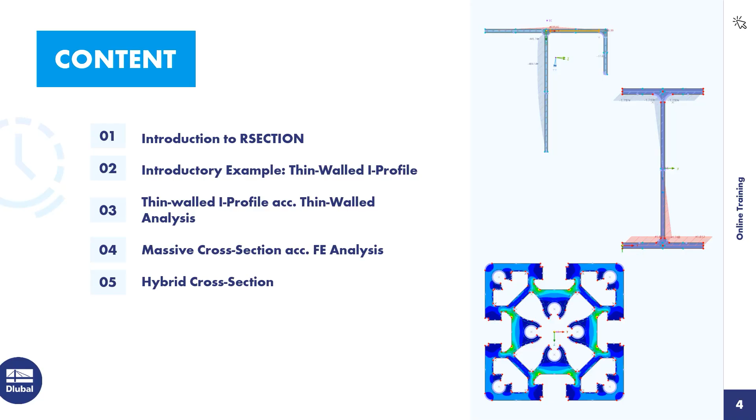In another example, I show you how to insert cross-sections from the database and how you can add other parts to this cross-section. Then I show the modeling of a massive cross-section based on a DXF template. Finally, I model a hybrid cross-section. Then I open RSECTION.

RSECTION is an independently executable program for generating any thin-walled or massive profile. If you want to design special profiles in RFEM or RSTAB that are not contained in the profile library, you can create them with RSECTION. You can then import these user-defined profiles into RFEM or RSTAB. In RSECTION, it's possible to calculate cross-section values and stresses.

The RSECTION user interface is the same as in RFEM 6 or RSTAB 9. The cross-section graphics and dialogues are displayed in the working window here in the middle. Most tasks can be performed with a mouse. In the tables here below, the keyboard is primarily used for numeric input and output of results.

There are three navigators in the left pane of the working window: the Data navigator, the Display navigator, and the Results navigator. The Data navigator manages the input data. A double click on the corresponding entry opens the dialog in which the selected object can be changed. However, it's also possible to create new objects via the Data navigator. Just right-click on the object and choose, for example, new point, and then you can enter the point properties.

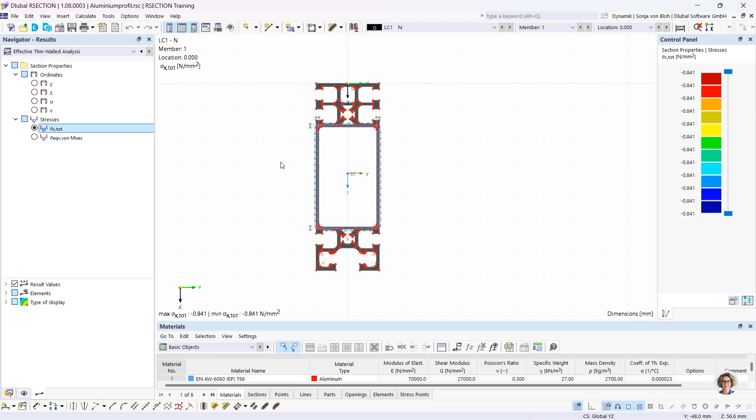Then I would like to go into the mouse functions. To move the section, you can hold down the mouse wheel and move the section accordingly. You can turn the mouse wheel to zoom, and right-click to open the context menu. You can also select objects with the mouse. If you drag a window from left to right, everything that's completely within the selection area will be selected. If you drag a window from right to left, everything that is intersected by the selection area will be selected.

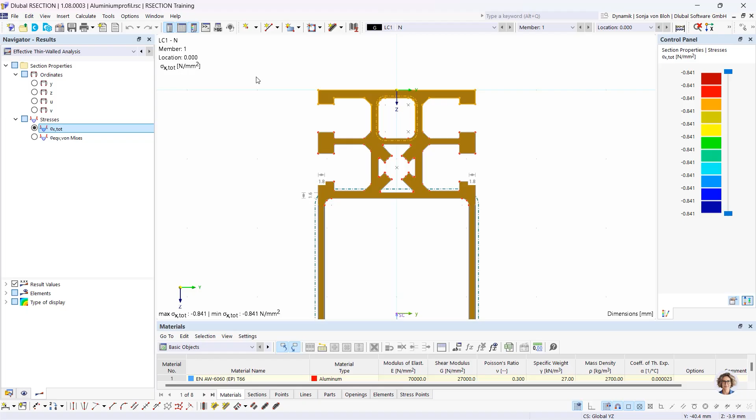You can also select individual objects. To do this, left-click on the objects that you want to select. If you want to add objects to the selection, hold down the Control key and then left-click on the corresponding objects. If you want to remove objects from the selection, hold down the Shift key and click on the objects.

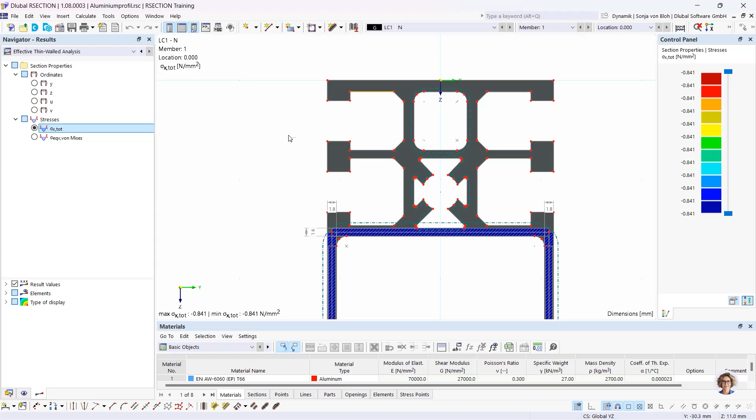This brings me to the first example. To create a custom profile, open the new model window via this button here. First, I have to enter the cross-section name. I name it example 1. Then I have to define the analysis method. We have two analysis methods available: the finite element analysis and the thin-walled analysis. I choose the thin-walled analysis here.

It's also possible to calculate the effective cross-section. For this, it's necessary to activate this add-on. The effective cross-section can be calculated for both analysis methods. After activating this add-on, a standard must be selected according to whose rules the subpanels are generated and the effective cross-section is calculated. The following standards are currently available: Eurocode 3 Part 1.1, Eurocode 3 Part 1.3 for cold-formed cross-sections, and Eurocode 9 for aluminum cross-sections. I choose Eurocode 3 Part 1.1 here.

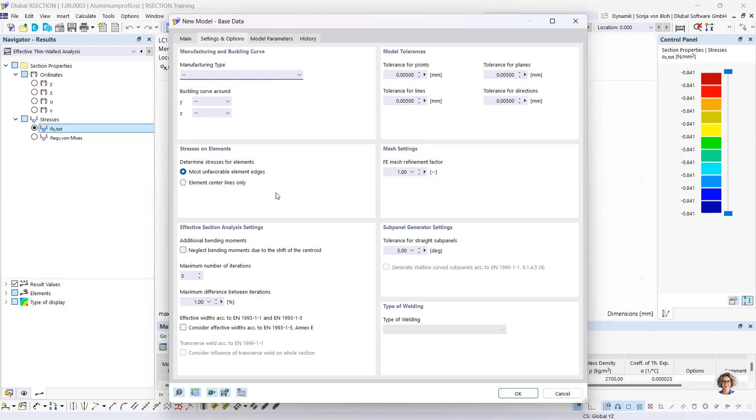Then I go to the settings and options. Here you have the possibility to define the manufacturing type. The manufacturing type determines which part of the standard is used for the design. For cold-formed cross-sections, Eurocode 3 Part 1.3 is used, and for hot-rolled or welded sections, Eurocode 3 Part 1.1 is used. I don't want to define the manufacturing type here, so I click on OK. Then the new file will be created.

I first define the material. A material is already defined, so I double-click on this material to open the Edit Material dialog. Here in the list on the left, it's possible to add a new material. It's also possible to copy a selected material or to delete a material.

It's possible to enter the material name directly here in this field. Here I enter, for example, S235, and now RSECTION lists all materials that match that name.

But I can also open the material library via this button here for a specific selection. And the material library filters are available to me to quickly find the material. You can filter here, for example, by material name, steel, for example, and you can filter by a standard.

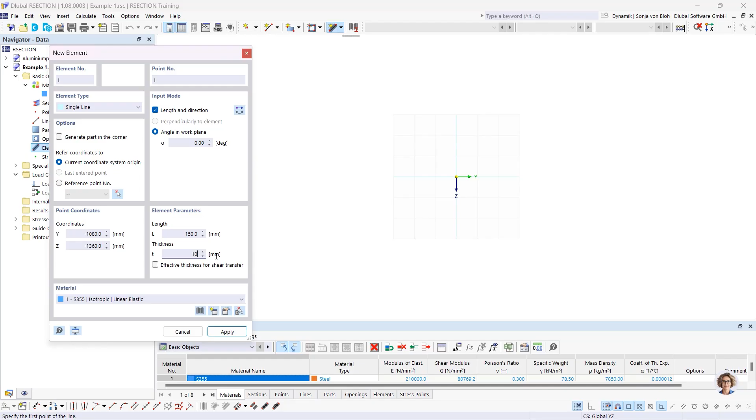I choose here single, and I want to use the input mode length and direction. I'll enter the bottom flange here first. The bottom flange has a length of 150 millimeters and a thickness of 10.7 millimeters. You can see here a preview of the element, and to create the element, I choose here the desired location, and then I left click with my mouse.

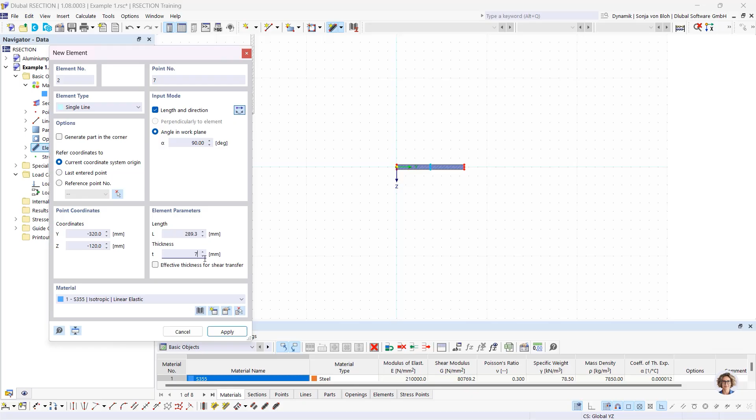Then I define the web, and for this I reverse here the orientation, and the web has an angle in the work plane of 90 degrees and a length of 289.3 millimeters and a thickness of 7.1 millimeters. And then I put this web here in the middle of the first element.

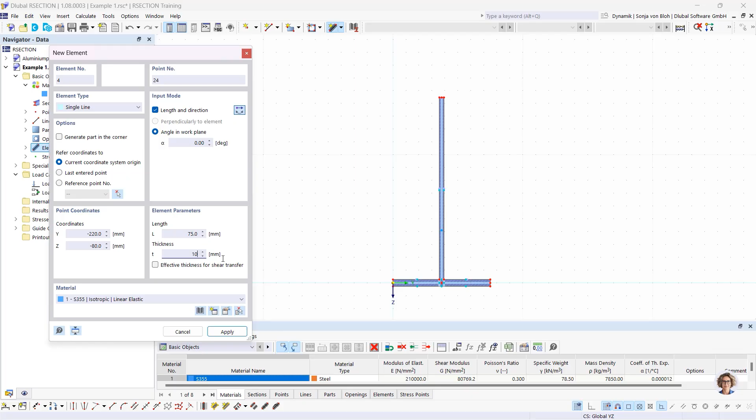Then I create here the upper flange. So I define an angle in the work plane of 0 degrees. Length is 75 millimeters. Thickness is 10.7 millimeters. And I choose here this point. Then I reverse the orientation to create the second part, and then I place this here. And with a right mouse click, I leave the window.

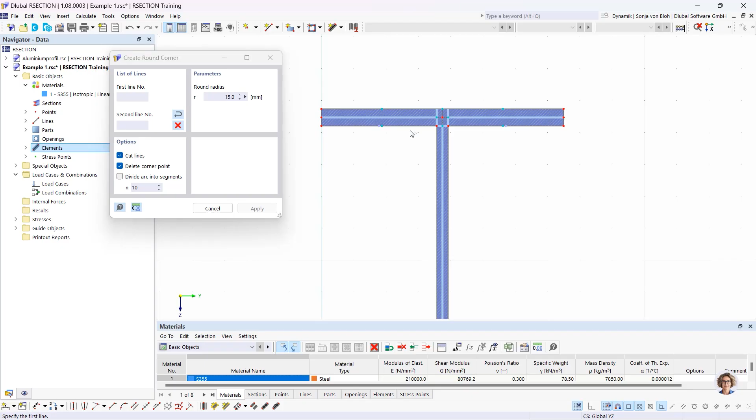The profile should be a rolled T profile to which a lower flange is welded. I want to also define here the root radius. So I can define lines to create this radius, or we also have a function that's called create round corner, and you find the corresponding button here at the bottom. And then you have to define the radius. This should be 15 millimeters, and all I have to do is click on the relevant lines. Right mouse click to leave the dialog.

Then I want to define the welds. The lower flange is welded with a 6 millimeter double fillet weld, and I create the welds using the create angled corner function. Here you have two corner types. You can define the corner via both edges or via edge and angle, and I choose here edge and angle.

It's also possible to calculate in the dialogs, so I define here for the length 6 multiplied by the square root of 2, and then I have to define the angle. It's 45 degrees, and click on the relevant lines.

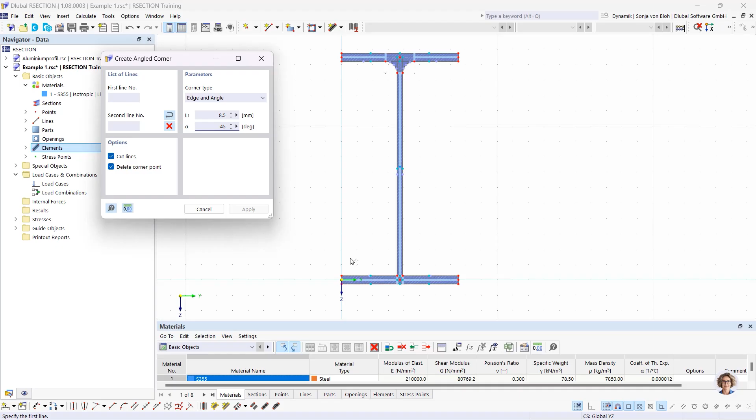What you can now see here are the subpanels, and these subpanels are automatically generated based on the standard selected in the base data. If no elements are defined, a cross-section classification in RSECTION and in the design modules of RFEM or RSTAB is not possible.

And neither a calculation of the effective cross-section is possible. In the design add-ons, this profile is then designed according to the cross-section class 3. I would also like to use this example to show you how to calculate stresses and the effective cross-section.

In order to calculate stresses or the effective cross-section, a load case must first be created. Load combinations can also be formed. So I create a load case first, and I will do this via the navigator data. Here I go to load case, new load case. I name this load case N, and I want to have an additional load case. So I create a new load case and I name this MY.

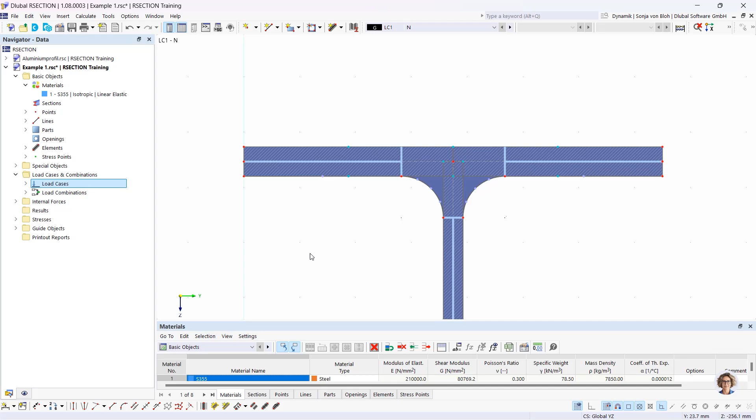Then I have to define the internal forces. The internal forces can be defined manually, or they can be imported from RSTAB or RFEM. If you want to import these internal forces from RSTAB or RFEM, you can do this via the table, internal forces, and here you have this function import internal forces from RFEM or RSTAB. I don't want to import these internal forces. I want to define them manually.

So I go to the navigator data again, open internal forces, and then I double click on internal forces for my load case number 1. And here I want to define a compressive force. Compressive forces are negative, tensile forces are positive, so I define minus 10 kilonewton. The axial force acts in the center of gravity of the cross-section.

I want to define a bending moment in load case number 2, so I click on apply and next. Then I change my load case to MY. And here I define 0 for the axial force and 100 kilonewton meter for the bending moment. And then I click on OK. If we look into the navigator data, you see now here in load case number 1, we have only defined an axial force of minus 10 kilonewton, and for load case 2, we have a bending moment MY of 100 kilonewton meter.

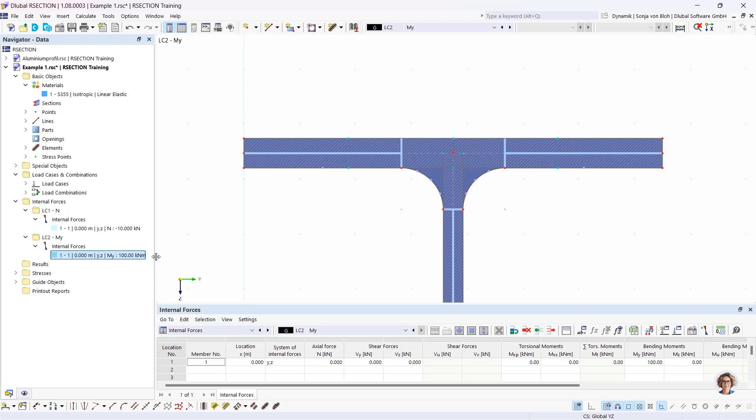The dots that you see now here in the graphics are the stress points. Stresses are calculated and displayed at the stress points. The stress points are generated automatically, but I can also define stress points manually. I want to define the stress points manually, so I go here to the navigator data, and then I open here the stress points. These are the automatically generated stress points, and I want to add a new stress point. So I choose here this option.

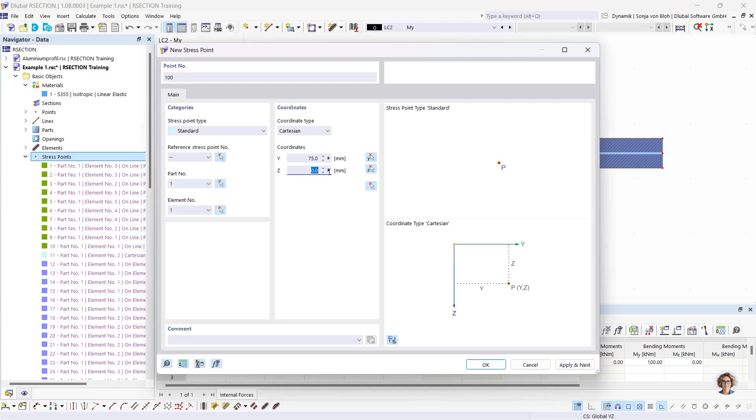The stress point should have the number 100, and then I have to define the coordinates. I can define the coordinates manually, or I can select a point in the graphics and import its coordinates. So I want to define it manually. It's 75 millimeter and minus 100 millimeter. And then I click on OK. Now the stress point is created. We can see the stress point here in the graphics.

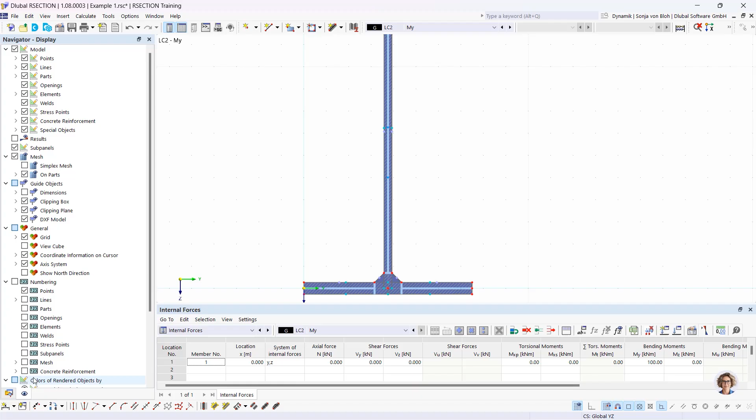It's also possible to show here the numbering. For this, I go to the navigator display. I activate here this checkbox numbering, and we have here also a checkbox for the stress points. And you now see the stress point number 100.

I deactivate this again. Which stresses are to be calculated and output in tabular and graphical form can be set in the stress configuration. I want to show you this now. For this, I go to the navigator data, and here under stresses, stress configuration, I find the stress configuration. The corresponding control fields are to be activated or deactivated here. Now only sigma x total, tau total, and equivalent stress will be calculated. That's okay here in this case. So I start the calculation now.

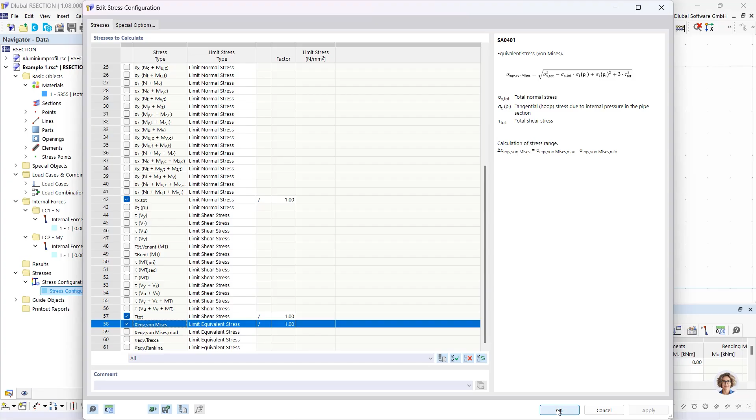In the results navigator, you can switch between the results of the gross cross-section, these are the thin-walled analysis results, and the results of the effective thin-walled analysis calculation. I show here the results of the gross cross-section first. The same possibilities are included in the tables. Here you can switch between the results of the gross cross-section and the effective cross-section. I choose here the results of the gross cross-section.

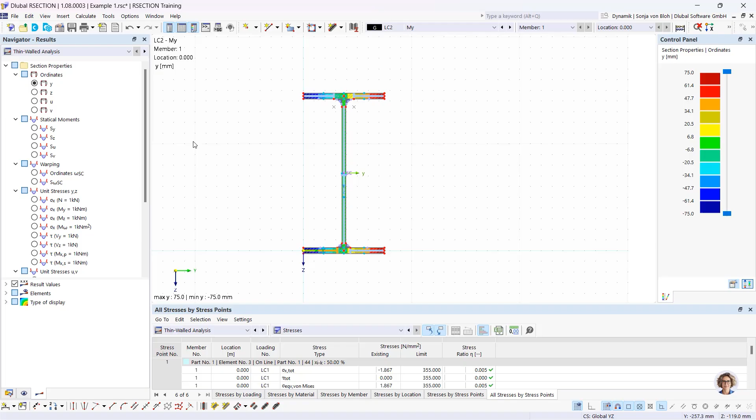And it's also possible to switch between the results here of the load cases and the load combination. I look at the load case 1 first, and I want to see here the stresses for load case number 1 for my axial force. It's also possible to change the type of display.

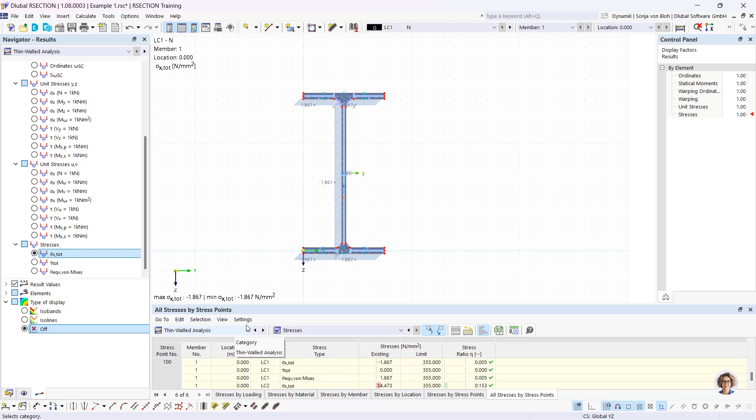I choose here off. And if you want to see the stresses on the stress points that we created, then you can go here to this table, open this tab, all stresses by stress points, and if you choose this stress point, then you go directly here to the stress point in the table.

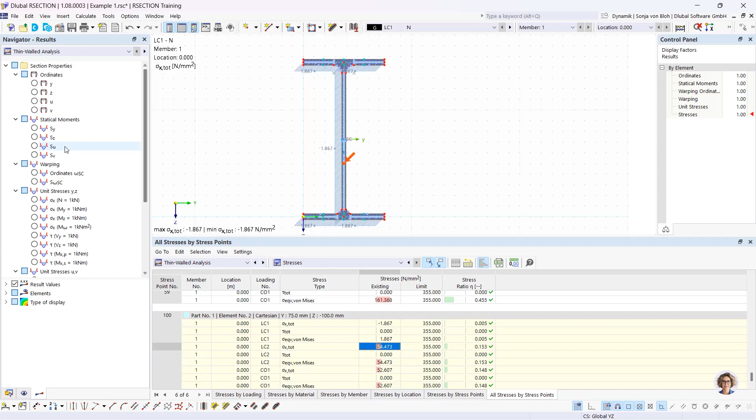It's also possible to show the statical moments as Sy, Sz and so on. We have the statical moments also in the table. Here, statical moments and warping.

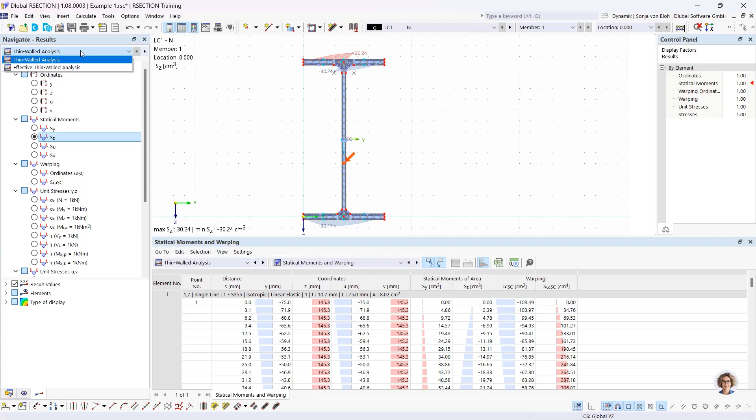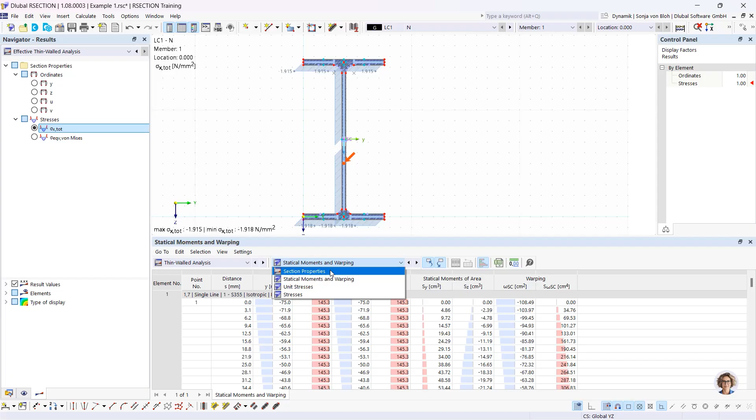I want to go to the effective cross-section results now. So I change here in the navigator results to effective thin-walled analysis, and I want to see here the stresses for load case number 1. I change this here also in the table. You see here the section properties of the effective cross-section in comparison to the section properties of the gross cross-section. The section properties of the effective cross-section are reduced.

You can see here graphically that in load case number 1, the web falls into cross-section class 4. Local buckling occurs in class 4 cross-sections. According to the standard, the reduction in strength due to local buckling can be taken into account through effective widths, and this is calculated automatically here in RSECTION.

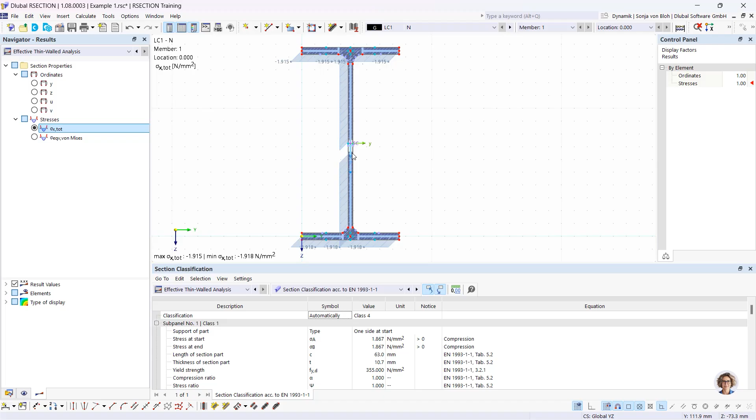You can see here the section classification also in the table. You see here, okay, classification, this cross-section falls into class 4. And if you click on the subpanel of the web, you see here the details of the classification. And it's also possible to see here the effective width of this subpanel.

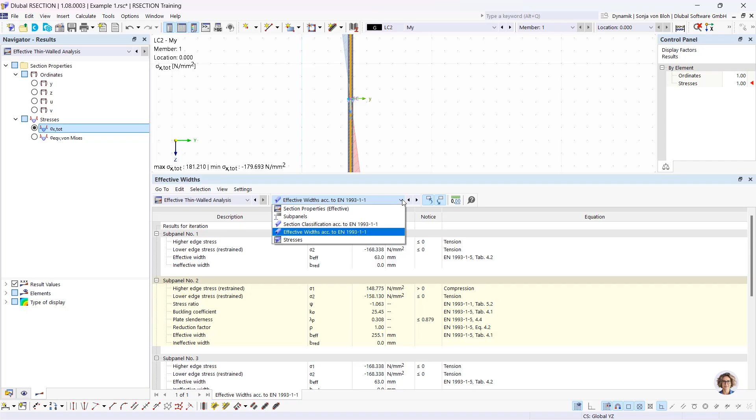Here if I switch to the bending moment and go here to the section classification, you can see this cross-section falls into class 1, so no reduction has to be made. And for the combination, I see that this cross-section falls also in class 1.

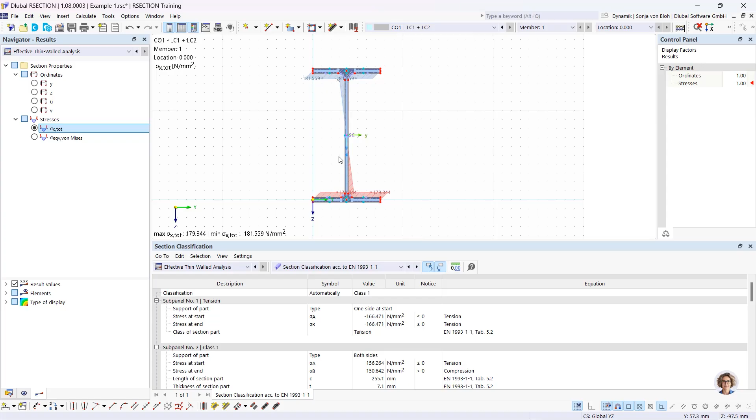I would now like to use another example to show you how you can access cross-sections from the library and modify them. For this, I create a new file via this button. I call it example 2. Here I choose the analysis method thin-walled analysis, and I want to calculate also the effective cross-section. So I activate this checkbox and I choose the standard Eurocode 3 Part 1-1. And then I click on OK to create this file.

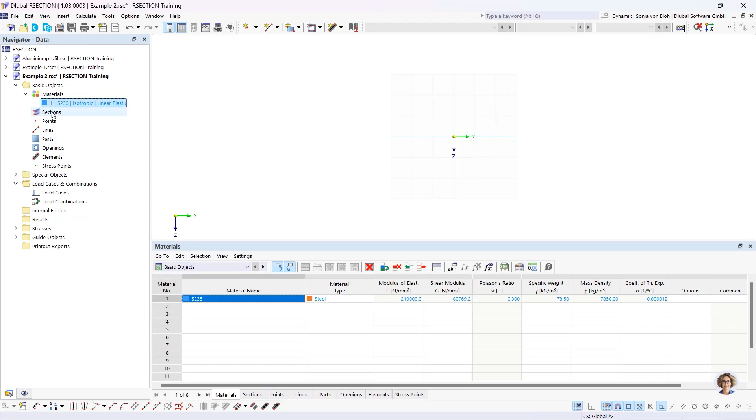I then define the material. This should be S235. So I open here the material library. I type the material name S235 from this standard, OK. And then I insert a cross-section from the cross-section library. To do this, I go here to the navigator data and open here the window new section.

The window is structured like the material window. A cross-section can be created or copied via the list here, via these buttons. I can enter also here the cross-section name, for example, IPE 200, but it's also possible to open the cross-section library via this button.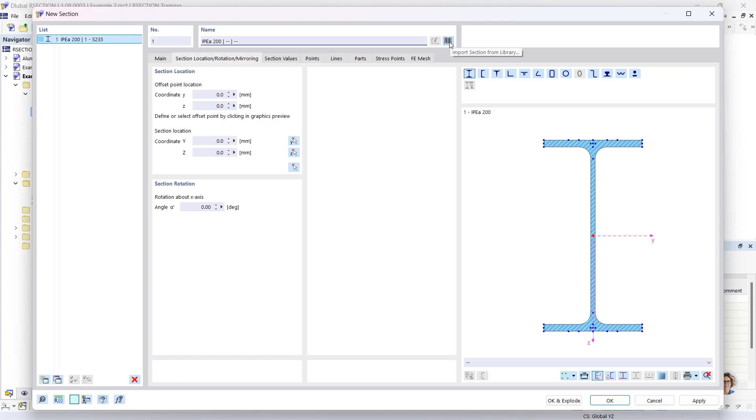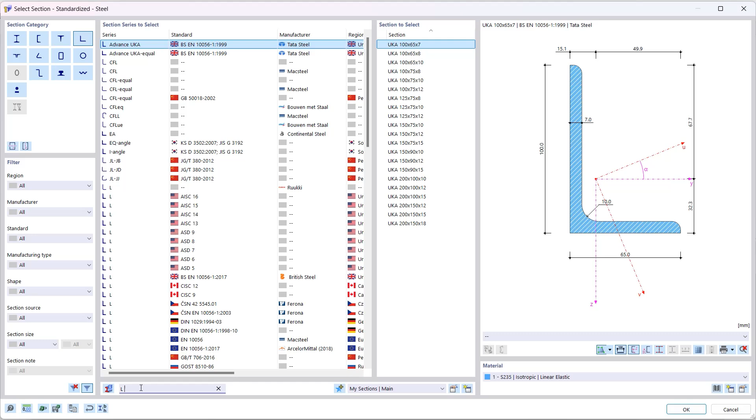A large number of profiles have already been entered into the profile library, and I want to choose here a standardized L profile, and the name is L 200x150x12. I choose here the standard, then I click on OK.

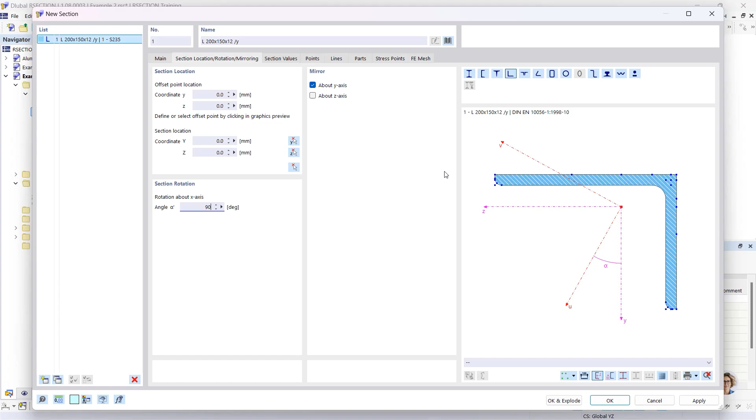The angle should be mirrored around the y-axis, so I activate this checkbox, and the angle should also be rotated about the x-axis, about 90 degrees. Furthermore, I select the offset point in the graphic, and at this point the profile is placed at the insertion point. I pick this point here, and then I define the insertion point. I can pick this also graphically here in the working window, and then I click on OK.

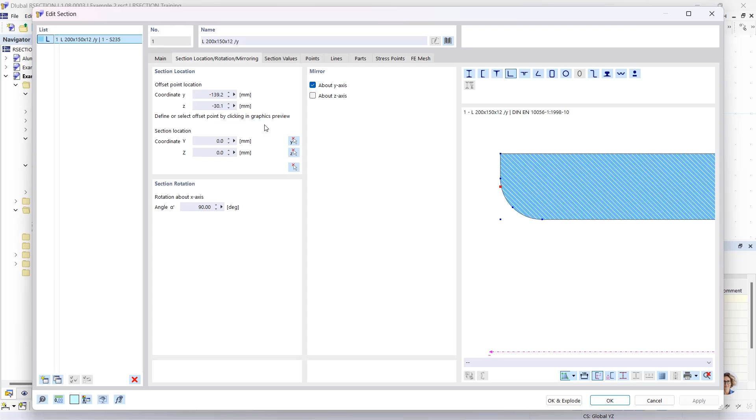When inserting this thin-walled cross-section, two elements are defined and one part will be created. The cross-section can be subsequently edited, moved, mirrored, or rotated. You can open here this dialog, or you can use here this function for move, copy, rotate and so on. However, in order to modify individual objects such as points or lines, the cross-section must be split. The cross-section is to be supplemented by further cross-section parts. I therefore split the cross-section into its individual parts for further processing. To do this, I right-click on this section, and then I choose here Explode.

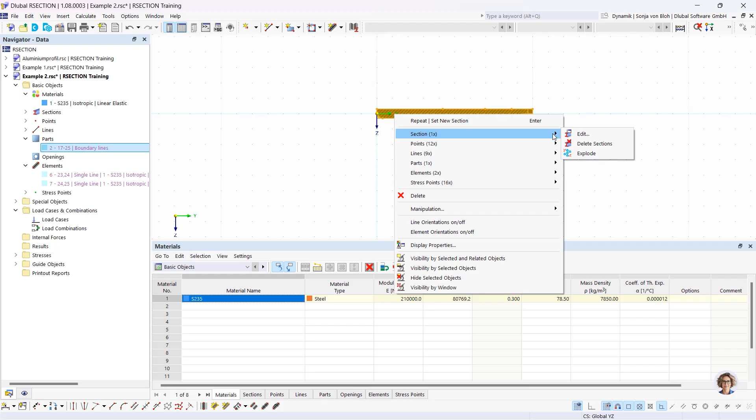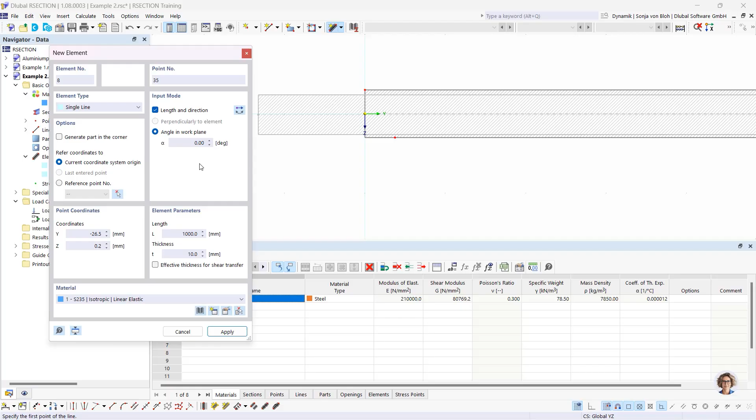The fillet isn't needed, so I delete this. So I choose here this point and click on delete. Now the part is deleted too. I also add more elements. I insert an element with a thickness of 12 millimeter and a length of 200 millimeter, and I will do this via the graphical input. Here I choose single. I choose the input mode length and direction, and I reverse the orientation, and the length should be 200 millimeter, thickness is 12 millimeter, and then I put this element here.

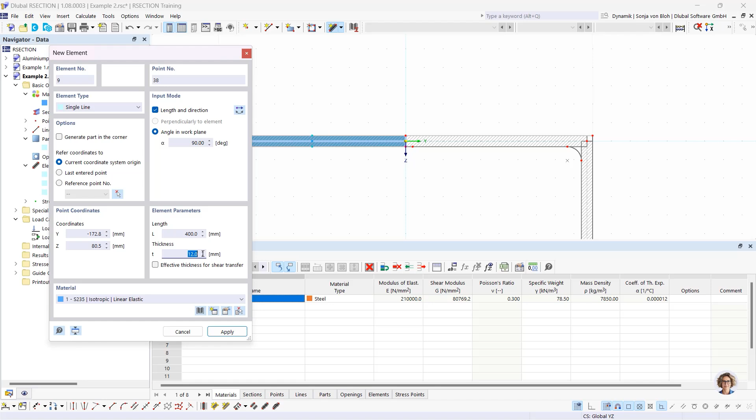I want to add another element for the web with a thickness of 10 millimeter and a length of 400 millimeter. For this, I define here an angle on the work plane. I have to reverse the orientation. Length should be 400 millimeter, thickness 10 millimeter, and I create this element in this position. I now delete unnecessary lines. I don't need this line, and I also don't need this line.

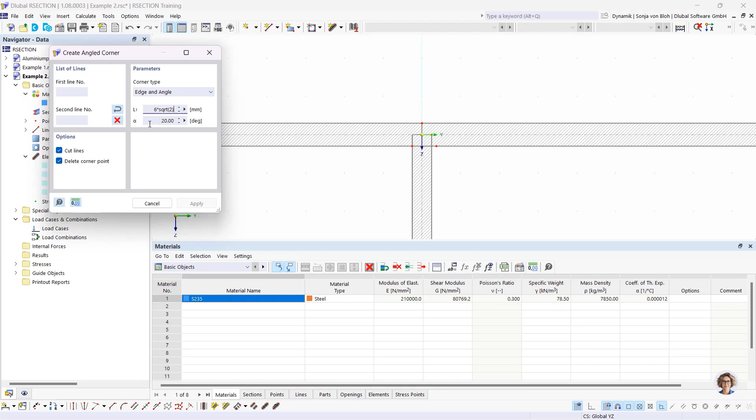And welding seams should also be taken into account, so I create the welds using the function create angled corner. Here I use the corner type edge and angle, and a double fillet weld is to be defined, so I define here 6 multiplied by square root of 2 with an angle of 45 degrees. And I define it here in these positions.

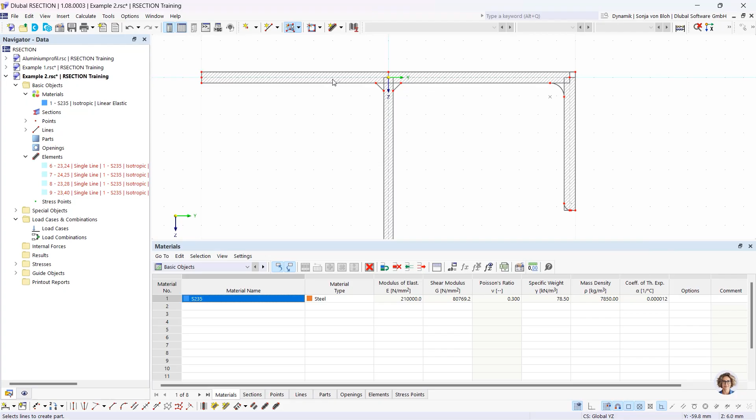Furthermore, I still have to create the part by selecting here this function select boundary. Here I have to choose the material, and then I click on the line, and now the part is created automatically. I would now like to calculate the effective cross-section and the stresses, so I create a new load case. I call this load case N, and a second load case My. I want to create also a load combination with N plus My, and I click on OK.

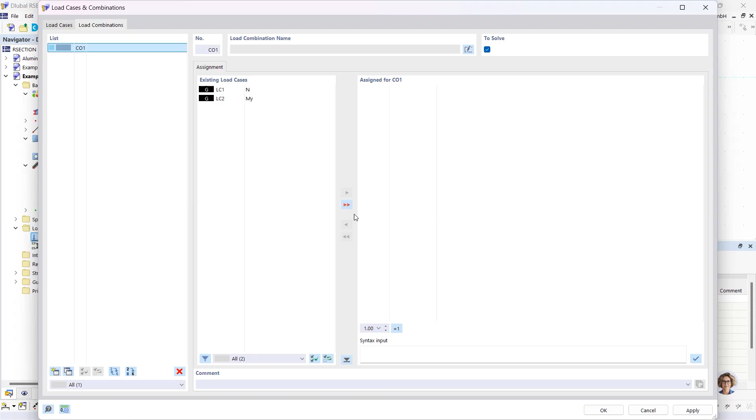Then I have to define the internal forces. For this I open here the internal forces, and in load case number 1 I create an internal force of -50 kilonewton, apply, next, change the load case. Here axial force should be 0 and My should be 20 kilonewton meter. Then I click on OK. I start the calculation now.

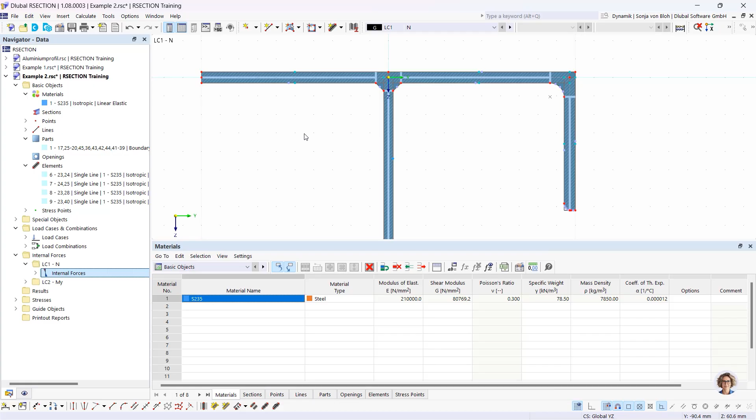I look at the effective result of the effective cross section. For load case number 1, I see a reduction in the web and in the flange. Looking at the section classification, this cross section falls into class 4 for load case number 1, and also for load case number 2, but here only the flange is reduced.

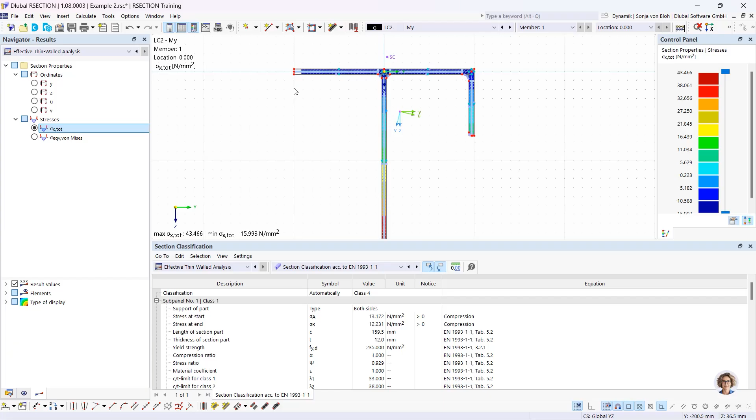We can change the type of display to off, and then we look at the classification of the load combination, and also for the load combination this cross section falls into class 4.

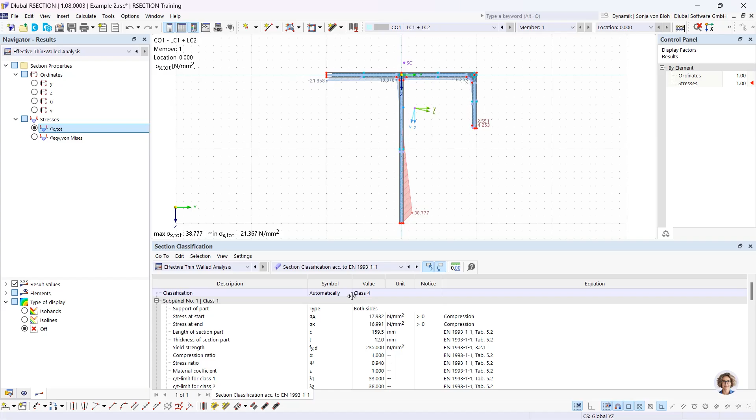I want to create the documentation now, and the documentation is done in the printout report. For this, I go to the navigator data again, and here I create the new printout report. Here I can choose the report items that should be included in the printout report.

I don't want to have the stresses by loading and material and so on. So I click now on Save and Show.

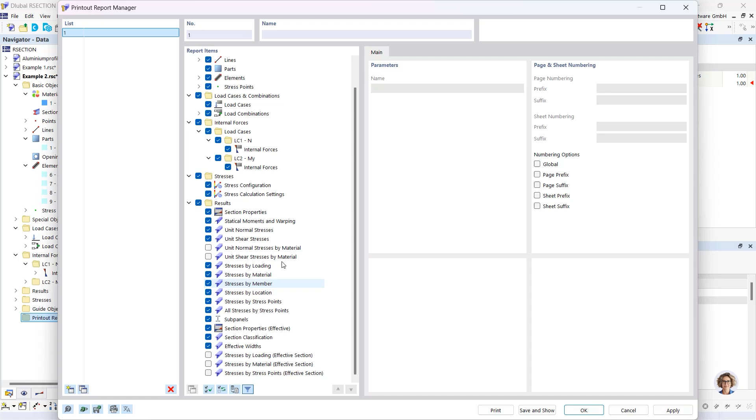Now the printout is created. We have here the tables that we have chosen in this printout report manager, and it's also possible to print a graphic to this printout report.

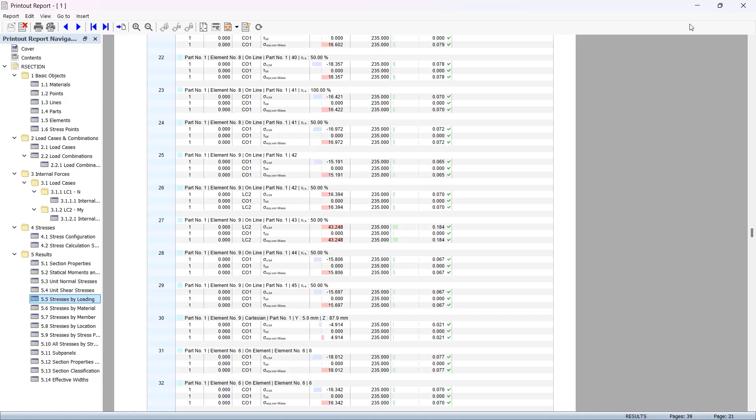I want to show you this now. To print this graphic to the printout report, I choose here this function, print graphics to the printout report.

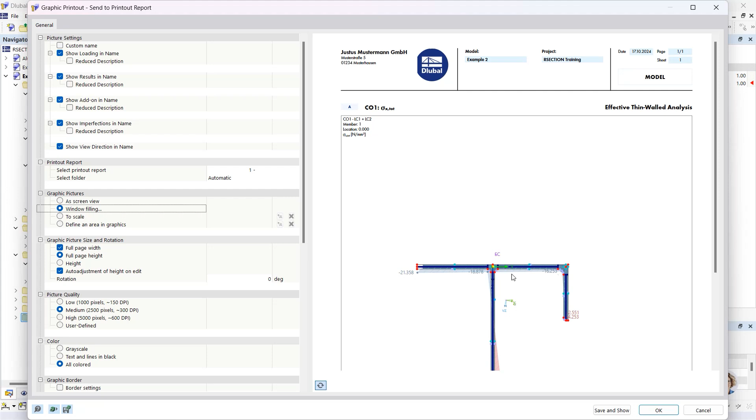Here you have the possibility to make various settings. You can define the graphic printed so that it's window filling, and you see this in the preview. Then I go to save and show, and now this graphic is printed to the printout report.

In the next example, I would like to show you that you can also create cross-sections by importing a DXF file.

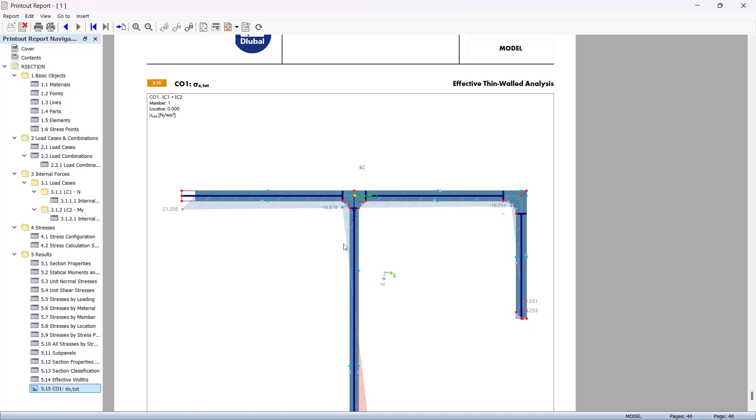Now I close this printout. A DXF file can be imported via menu File, Import DXF. Then I choose the corresponding DXF file and click on Open.

I don't want to import this DXF file into the active model. I want to create a new model, so I click here on No.

In the section Create RSECTION Model, you have 3 options for creating the cross-section. The automatic creation of elements is useful if the outlines of the cross-section are available in the DXF file. RSECTION attempts to create center lines for parallel lines and then set the elements between the intersections. Only elements that do not exceed the maximum thickness defined in this maximum thickness field are created.

The import function using DXF template lines as center lines is useful if the cross-section geometry is available as a centerline model. The lines of the DXF template are considered as the center lines of the elements. The thickness defined in this field T is assigned equally to all elements.

The function create DXF template is useful for massive cross-sections where no elements need to be created. In addition, this function can also be used for complex cross-sections where I only want to create elements for the decisive cross-section parts. With this import function, the lines in the DXF file are imported as lines. You can then use these lines as an aid for modeling.

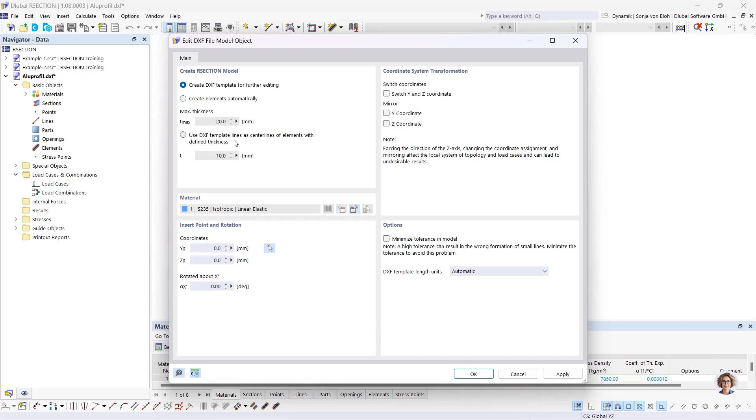I use this function today, so I click here on OK. Now the lines are created. A finite element analysis is to be carried out on the imported profile.

I set this in the base data. For this, I open the base data. This is already chosen. A finite element analysis should be performed on massive cross-sections, such as timber cross-sections or concrete cross-sections, in contrast to thin-walled cross-sections, where the stresses can be regarded as constant across a cross-section thickness.

The stress distribution in solid cross-sections is variable. This can only be determined with a finite element analysis. So I click here on OK.

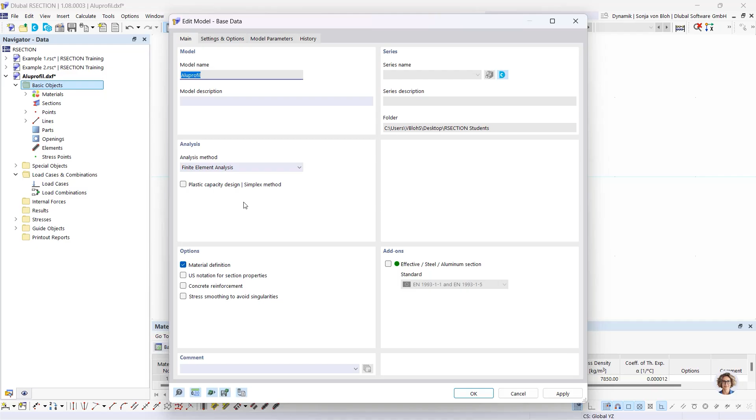Then I have to define the material. This should be an aluminum material, so I modify this material. I open the material database. I choose the filter aluminum, and this should be a 6060 aluminum material. Here, this material, OK, and then OK.

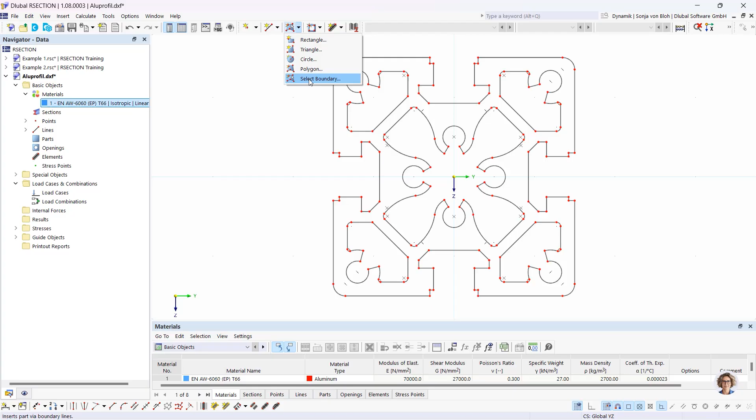In a finite element analysis, only a surface needs to be defined, no elements needed. I would only have to define elements if I also want to calculate the effective cross-section or carry out a classification. So I only have to create a part here, using the function select boundary. Then I click on the outline and the part is created.

After creating the part, I still need to create the openings. For this, I use the function select boundary for openings, and then click on the relevant line. I want to show you that you can also create openings by rotating them.

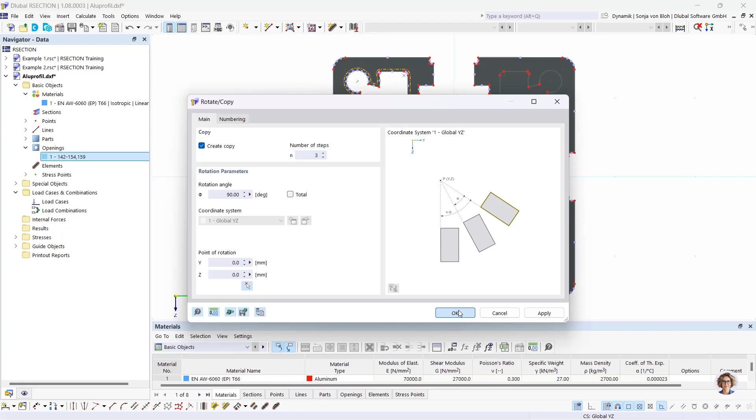So I select this opening, and open the function rotate selected objects. Here I want to create a copy - I want to create 3 copies. Rotation angle is 90 degrees, and the point of rotation is here in the middle. Then I click on OK, and now the openings are created.

I still need an opening here in the middle, so for this I use the function select boundary again. And now the cross-section is complete. I want to calculate the stresses here as well.

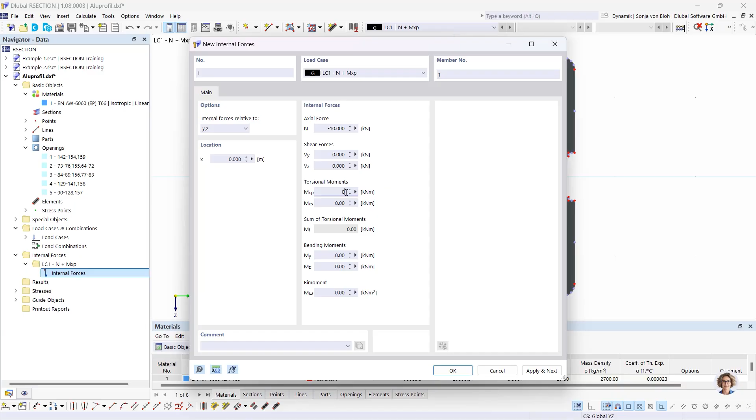So I create a load case, new load case, and name this load case N plus Mxp. Then I click OK. Then I define the internal forces in the load case. The internal force should be axial force of minus 10 kilonewton and torsional moment of 0.3 kilonewton meter. And I click OK.

Then I start the calculation. And now I look at the results. I want to see the stresses sigma x, and also the shear stresses. And I look also at the stresses, sigma equivalent.

I want to create a printout, and I want to include this graphic as well. So I create a printout first. I go to this navigator data, then right click on printout, new printout. I select the relevant items, then click on save and show.

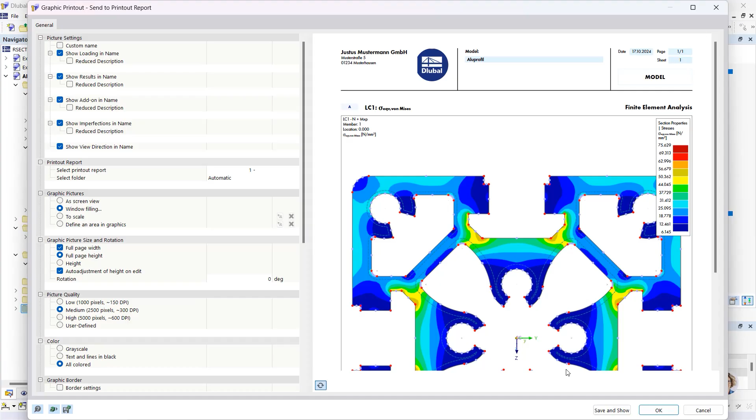And I want to add this result graphic to the printout report. So I choose here print graphics to the printout report. Save and show. And now this graphic is also printed in the printout report.

As a last example, I show the modeling of a composite cross-section. In RSECTION, it's also possible to model cross-sections that consist of different materials. Ideal cross-section values are determined for such a cross-section.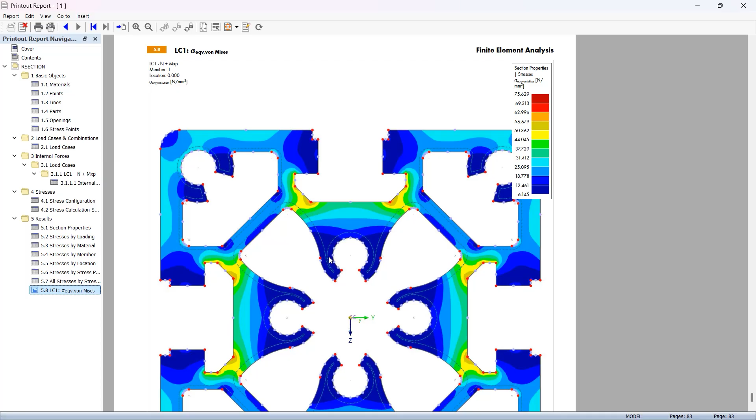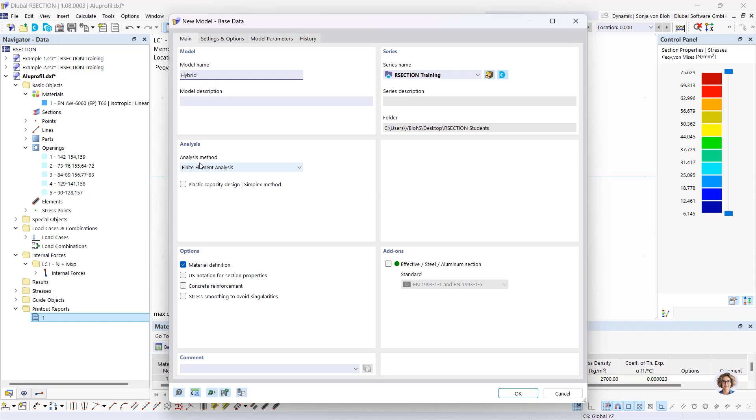For this, I create a new file and name it hybrid. A 1,000 millimeter wide and 200 millimeter high concrete cross-section lying on an HEB steel cross-section is to be modeled. So I choose for this the analysis method finite element analysis. Then I click OK.

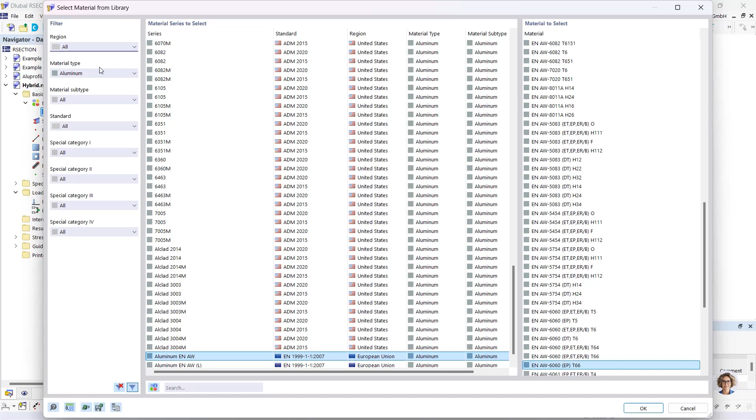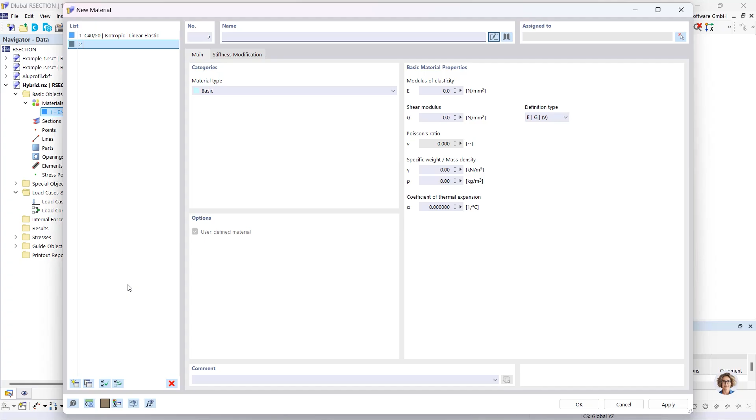I define 2 materials. For this, I open the edit material dialog. First, I define the material for the concrete part of the cross-section. I open the material library and search for C40/50 from the standard. Then I need an additional material for the steel cross-section, so I create a new material, open the material library, and this should be S235. Then I click OK and OK.

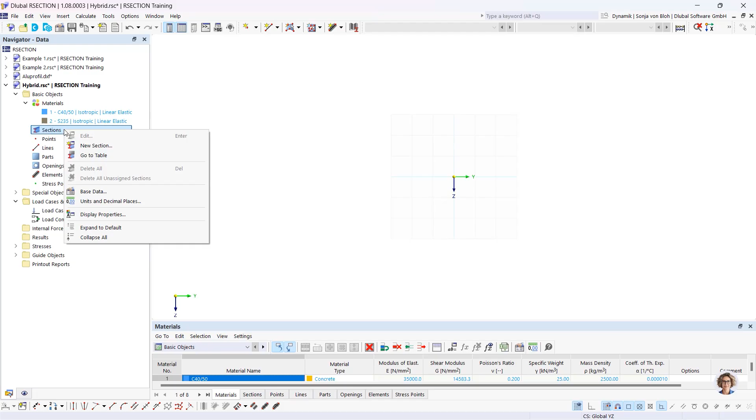First, I model the concrete cross-section. For this, I use a cross-section from the library. So I choose here new section. Geometry B is 1000 millimeter, H 200 millimeter, and then I click OK.

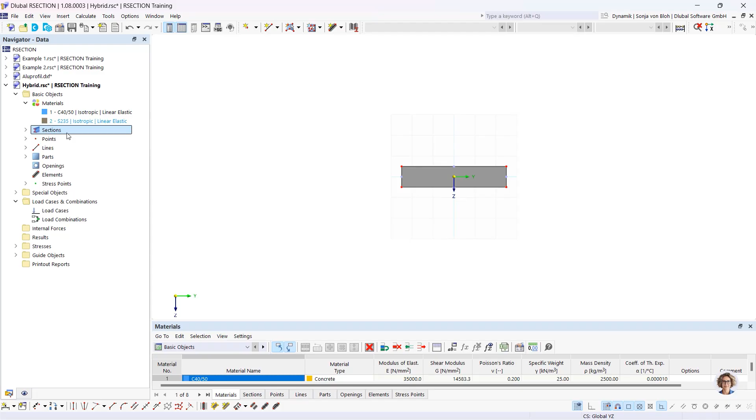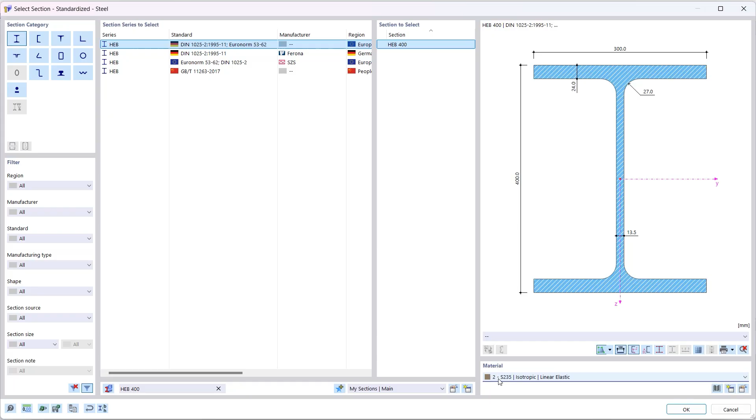Then I create my steel cross-section. This is also included in the section library, so I create a new section, open the section library, open the I-beams, and look for an HEB 400, with material S235. I choose the center of the top flange as the offset point, and the bottom of the concrete cross-section as the insertion point. Then I click OK.

I now create a load case because I want to also calculate the stresses. So new load case, I name it M. And in this load case I define my internal forces - this should be a bending moment only, My 100 kilonewton meter.

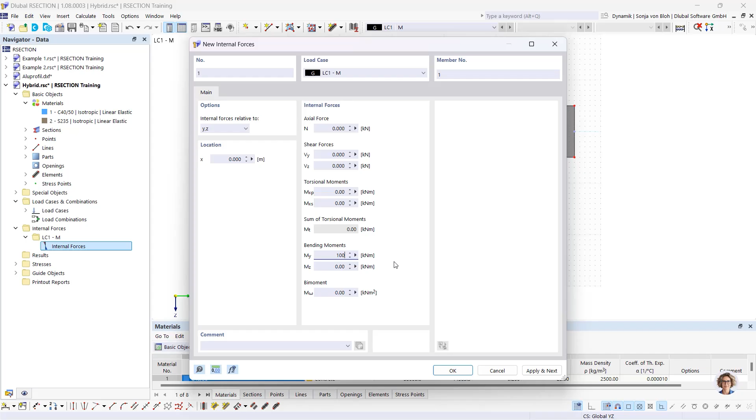I start the calculation now, and here the stresses are calculated, section properties, and so on.

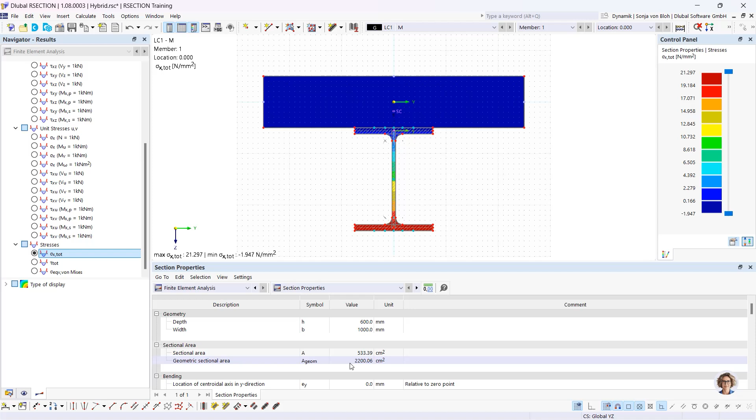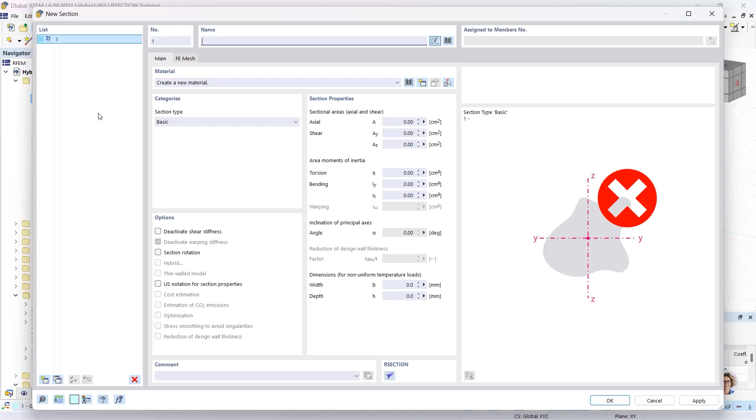I would also like to show you how to import the cross-section into RFEM. To do this, I save the cross-section first, and then open RFEM. I've already created a file. Then I have to import this cross-section. To do this, I go to the navigator data, sections, new section, open the cross-section library, section from RSECTION, and then choose this hybrid cross-section.

You see now the option hybrid is activated. I also have a tab for material assignment, and I now see which materials are assigned to the cross-section parts. I see here also the reference material. It's also possible to define a different material here.

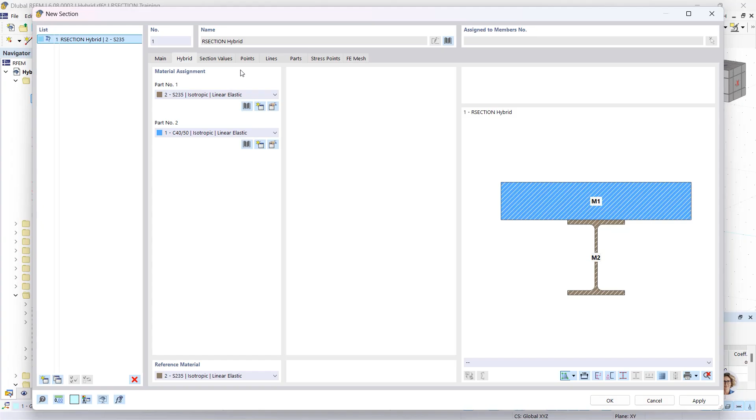Then I click OK, and then I can use this cross-section. I can create a new member with this cross-section, and use this in my static analysis.

With this example, I have come to the end of the training. It was taught how you can create general cross-sections with graphic functions, how you can add cross-section parts to database profiles, and create profiles based on a DXF import.